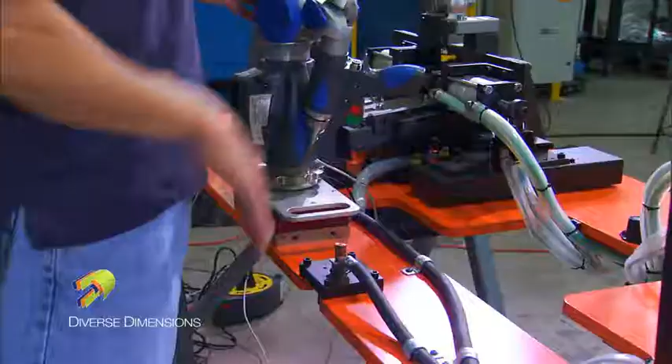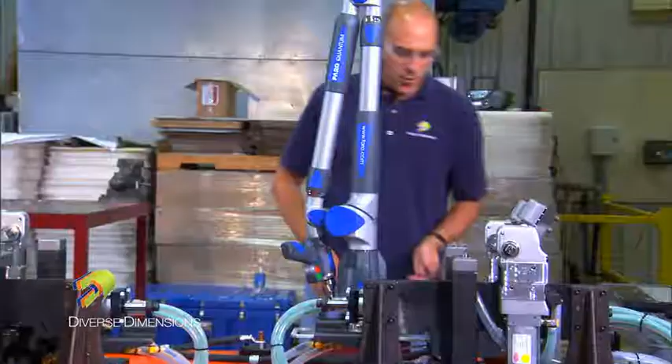We're physically going to replace the readings on the spheres and then continue measuring in the new model. So I'm just going to power this down, and then I'm going to disconnect all of my cables here. And what I always do too is I like to make sure that the place I'm going is clean. I've prepared the surface already for my mag base. I'm good there. Got nothing in my way. I don't have cords I'm going to trip over or air hoses or anything like that. So I've got a pretty straight shot.

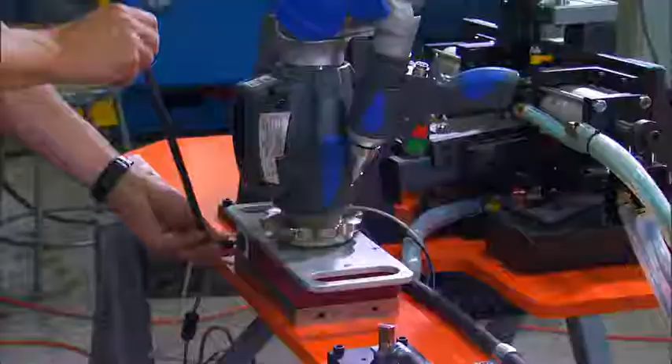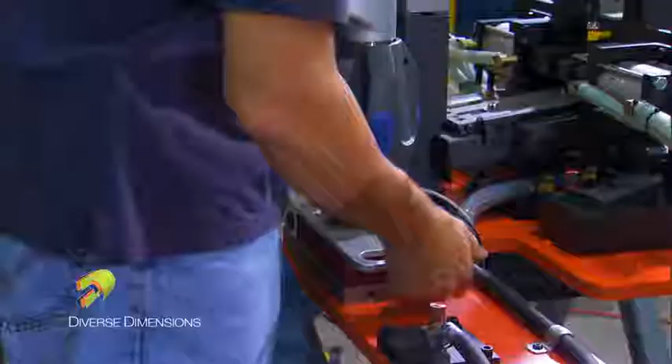So what I'm going to do is just take the mag base, deactivate that right there. Maybe I should take this with me. That's a good idea. And then I'm just going to take this arm, rest it on my shoulder, and just tilt it back. With both hands, I've got that mag base pretty well secure here, and I'm just going to take a walk.

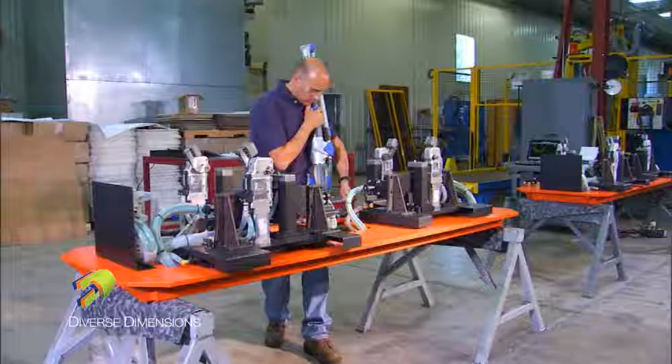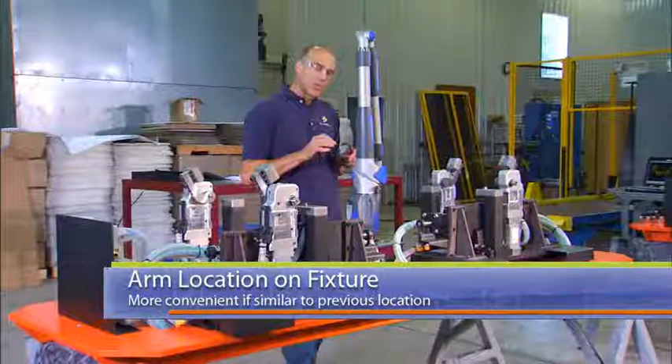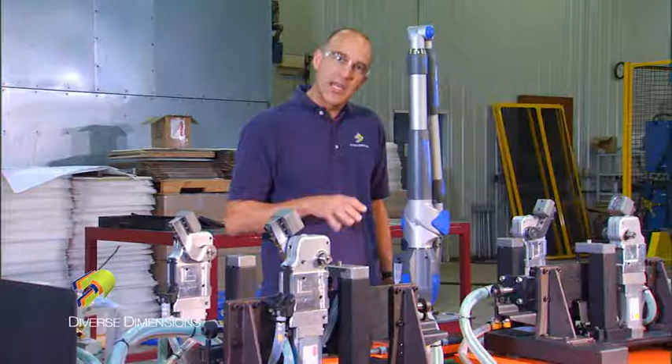And now I'm putting that arm in generally the same location that I was on that fixture as well. So it's just going to make it easier once we get into the alignment to see where we're heading. So I will take this mag base, activate it down to the fixture so I'm nice and solid on that. And then I'm going to just connect all my power back up, pull the laptop over, and then I'm going to get into the edit and replace readings. So hang tight, we'll be right back.

Now I physically made the jump from that fixture over to here, reconnected up all of my cabling here, made sure the mag base was down solid, and I've exercised my joints since I powered this machine down too. So I'm communicating with the arm now. So what I'm going to do is edit and replace the readings on these 3 tooling spheres.

But big note, make a big note of this. Make a new file, just change the name on it. This is Operation A. So just make a new file before you start manipulating any of these features by replacing the readings. So make a note of that, man. Always change the name on the new location. Okay, so let's go. We're going to jump into the SAT file, and I'm going to take you into review features here.

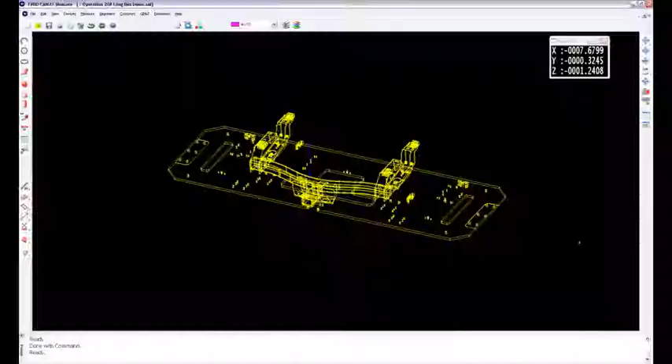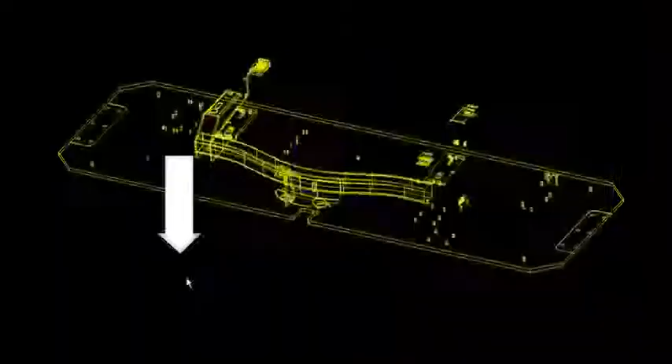With that icon there, here's the review features. Now notice I have got all 3 of these spheres already measured. I've got my alignment out there, and I've got one of the pins already measured, so I want to show you what happens to that as well. So what I'm going to do though first is I'm just going to go to the center sphere, and I'm going to edit, and I'm going to replace its readings and say OK.

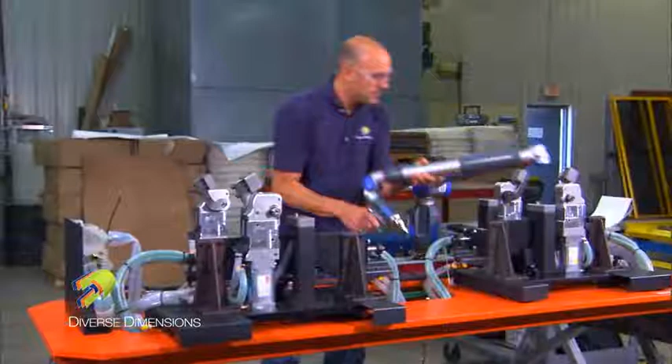So I'm going to head out here, measure that sphere in the middle, and I'll do that with 5 clicks just like I did before. 1 on the top. Then I'm going to put 4 around the equator to add up to 5. Compensate away. Go back over to review features. It resolved for that new location.

Of course, it's kind of a funky location here, because it is solving for the alignment each time I measure these. So now I'll go to the right sphere. I will edit, and I'm going to replace its readings and say OK. Again, I'll just let the arm rest a little bit. I'll come back into the sphere on the right, and I'm going to hit 5 clicks. 1 around the top, then 4 around the equator.

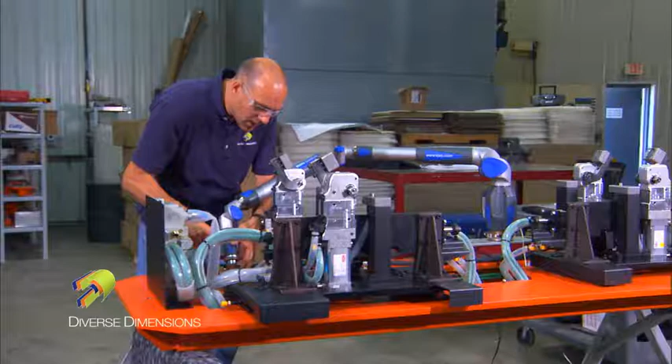Big note to mention here, though, too, is that it's very important that both of these fixtures have the tooling spheres in the exact same location in the CAD model. It's the only way this is going to work for me to edit and replace the readings.

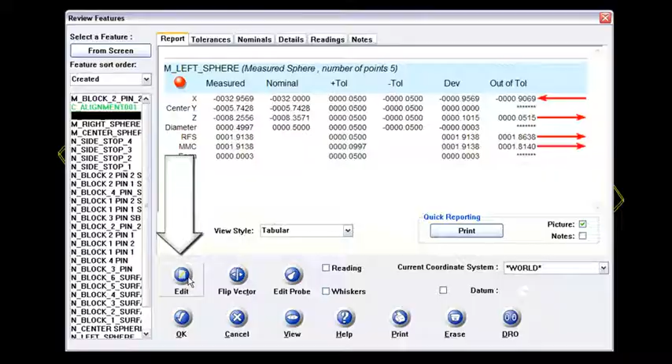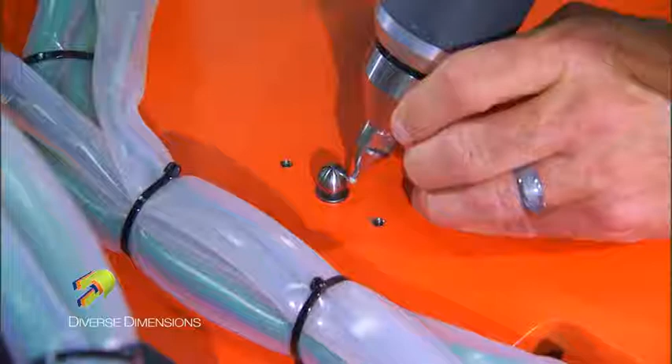So back into the SAT file, I've got one more sphere to do, and it's my left sphere. I'm just going to go out and edit and replace its readings and say OK. And that will be this sphere here. Again, 5 points, 1 on the top, 4 around the equator. Again, I could use many more of those points too, but I'm going to pick those 5 and compensate away. And every time I'm measuring or remeasuring these spheres, Faro goes through and it realigns the part based on that new location.

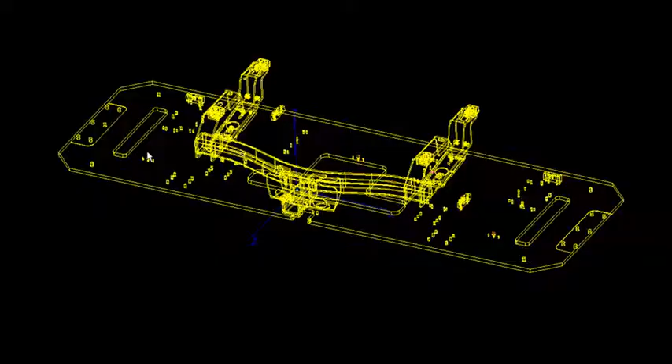So now, back over here to the SAT file, notice that if I hit my view, I'm going to zoom in just a little bit more too to show you that. That's the sphere I just measured. That's the left sphere. And I'll scroll on over here. Notice here's my center sphere. And then down in here is my right sphere. So Faro went through and it realigned the part based on these new locations.

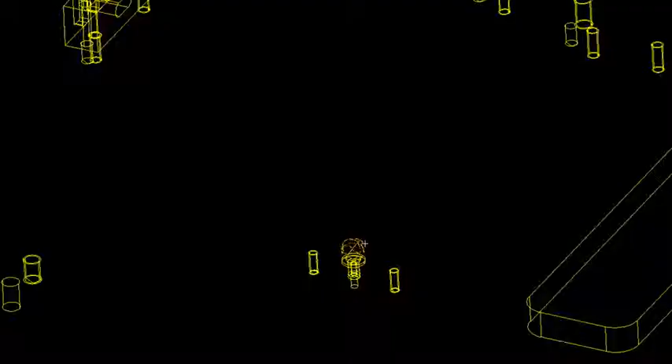I haven't done the leapfrog. Don't get this confused. It's the same device position. I'm not recreating device position 2. I'm sticking with one device position, but I'm physically measuring on a different fixture. Okay, so I've got the alignment that looks pretty good. I'm going to hit the right mouse key here, and I'm going to say OK to that.

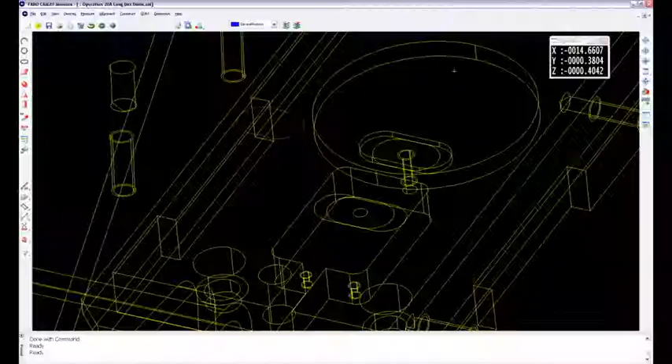So now that I'm into the same position that I was on the other fixture and in the model, you'll notice that this slot location, this datum pin, is kind of shifted over. So I didn't get this thing in the right spot. I mean, who could? So it makes it very easy, though, to get into the model based on those 3 spheres. But what I do want to show you guys, to convince you that you're in the right location, is under the SAT file, you can go to the Measure pull-down menu and go to the Inspect XYZ. That's going to show me where the position of my probe is in the model.

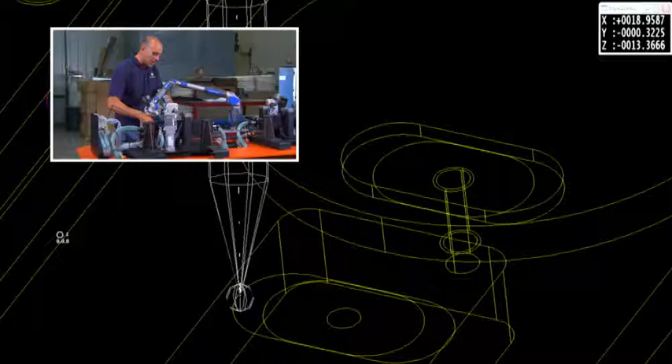So I'm going to take that old probe and I'm going to go to that same datum pin in this location here. Now notice what I've got. That SAT file is showing me, hey, I'm in that location. That's where I want to be. So I'm convinced that I'm in the same alignment that I was when I was on the other fixture.

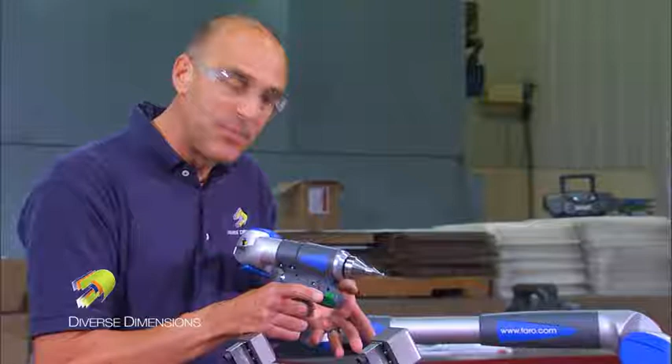But now what I have to do is go through and edit and replace the readings on that round slot, which I'll do next. So I'm not going to bother you guys with that one, but if you've measured fixtures like this in the past, you can do that same thing. And it only works if those 3 spheres are in the nominal same location on both fixtures.